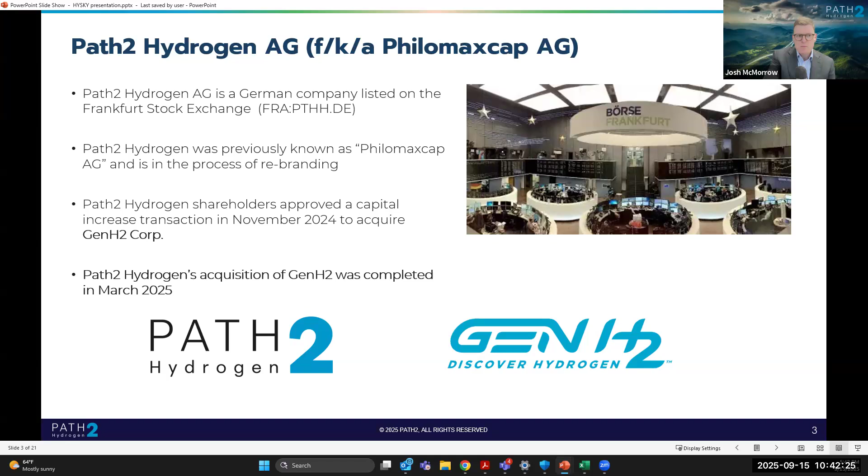So as I mentioned, Path2 Hydrogen is the parent company of GenH2. It is headquartered here in Germany, and GenH2 is a 100% subsidiary of Path2 Hydrogen. As I mentioned, we used to be called Philomaxcap. We are literally in the process right now of changing our name. So you may see both of those for a little while, but Path2 Hydrogen is the future name of the parent company. We completed the acquisition of GenH2 earlier this year, and I'm very excited to continue with the company's commercial deployment in North America. And we're now moving with purpose into Europe and into Asia Pac.

I always find it useful, this group is very tuned into hydrogen, but I always like to tell analysts or investors or people that are new to the space what GenH2 is and what it isn't. I refer to GenH2 as a specialist in midstream hydrogen technology and equipment. So we are not upstream. We don't produce the molecule. Everybody talks about the different color wheel of types of hydrogen.

For our sake, we focus on once that hydrogen is produced, we then liquefy it through many different sizes and types of liquefiers. But most importantly, and what GenH2 is really known for, is our ability to transfer and store that liquid hydrogen without any losses. And I'll go into more detail about that.

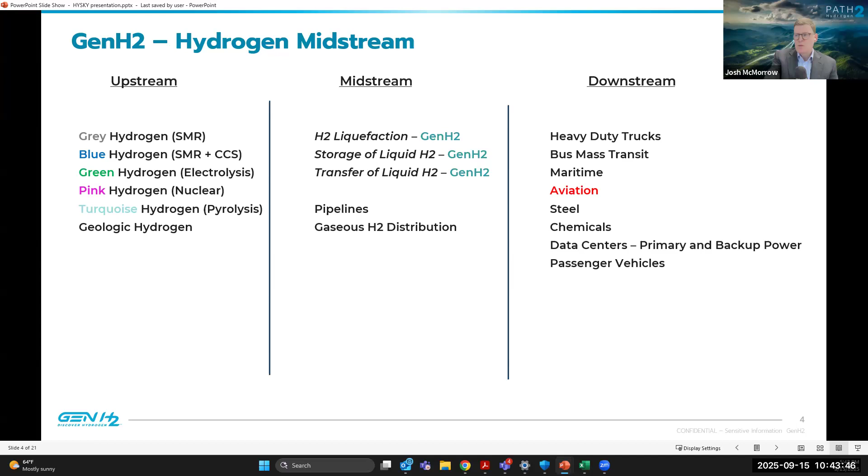Once you can achieve zero loss transfer and storage of liquid hydrogen, it really addresses one of the major pain points of liquid hydrogen, because there are so many benefits that I'll talk about shortly. But one of the key drawbacks up to this point has been the boil off and venting losses that I'll go into more detail during this presentation.

So a quick overview of GenH2. It is a company that's been around for about 4 or 5 years. It is headquartered in Titusville, Florida, which, as many of you know, is the home of NASA's Kennedy Space Center.

And there's a reason that it's headquartered in Titusville, Florida. It has deep ties to NASA. In fact, one of my favorite statistics about GenH2 is that in the history of NASA, there are only 45 — it used to be 42, but a few just got inducted — there are 45 NASA Inventor Hall of Famers. GenH2 has 2 of those Hall of Famers on staff, and one of them is one of only 5 women to have received that designation as a NASA Inventor Hall of Famer.

So we are quite proud, and it shows the depth and our ability to really punch far above our weight when it comes to our ability to understand liquid hydrogen, work with liquid hydrogen, and know what it takes to transfer and store it without any losses. Our footprint basically is most of the folks are located in the US and in particular in Titusville, but we have offices in Berlin, Germany, where I am, as well as a small office in Seoul, Korea.

So I mentioned this earlier. I always like to think about it in terms of what problems is GenH2 solving. So 2 of the problems as we think about it are, 1, the liquid hydrogen supply chain is losing 30 to 50% of the hydrogen delivered. Now, that's not just us saying that. Many of you have probably seen the recent article that came out by David Lease in H2 View.

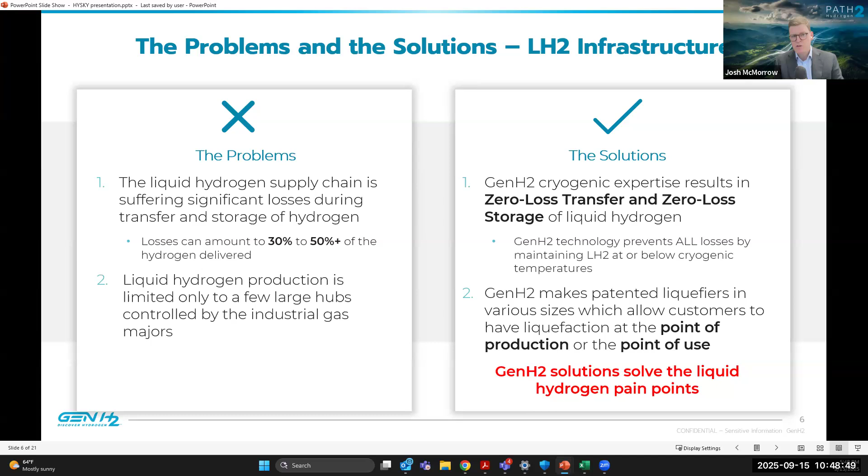But when you take a big step back, the real difference in the value that GenH2 is bringing to the marketplace is you can place these hydrogen liquefiers directly at the point of production. So think of an electrolysis facility or a hydrogen pyrolysis facility. Any way that the hydrogen is produced as a gas, you can put a GenH2 liquefier right there to liquefy 100 kilograms a day, 1 ton per day, 2 tons per day, 5 tons per day. It's very flexible and modular, and really brings a lot of advantages because you can do this liquefaction at the point of production or at the point of use.

So I probably don't have to go into too much with this audience on why liquid hydrogen versus gaseous, but there's a couple of these that I would like to have the group think about today. Obviously, liquid hydrogen has much higher density than gaseous hydrogen. It's much more efficient in transportation. Its ability to scale: earlier presentations have talked about the fact that gaseous hydrogen is very good for demonstration or small use cases. But once you really want to scale up to dispensing 1 ton per day or 2 tons per day or even more, liquid hydrogen makes a ton of sense. Otherwise, you're going to be running tube trailers out to this location essentially 24 hours per day.

The duty cycle isn't great, and there are many, many maintenance issues and more components when you're talking about gaseous hydrogen. With liquid hydrogen, it gives you a lot of flexibility to have fewer components, to have much more reliability to your operations, but you then have the flexibility once it's in liquid form to dispense as gas, to dispense as cryocompressed, or to dispense as liquid. But you don't have that flexibility if you start with gas.

For this group today, when we're thinking about aviation in particular, this next point is of utmost importance, and that's the safety. Gaseous hydrogen, again, I'm preaching to the choir here, I realize, but gaseous hydrogen is kept at 350 bar, 700 bar, sometimes 900 bar, whereas liquid hydrogen is kept at very, very low pressures, which means if you want to set up infrastructure for airports or marine ports or places where you really have to think about blast radiuses and what can be placed near something, and can it be placed in an operation where hundreds of thousands of people are transferring at an airport near there, liquid hydrogen is the answer because of its low pressure.

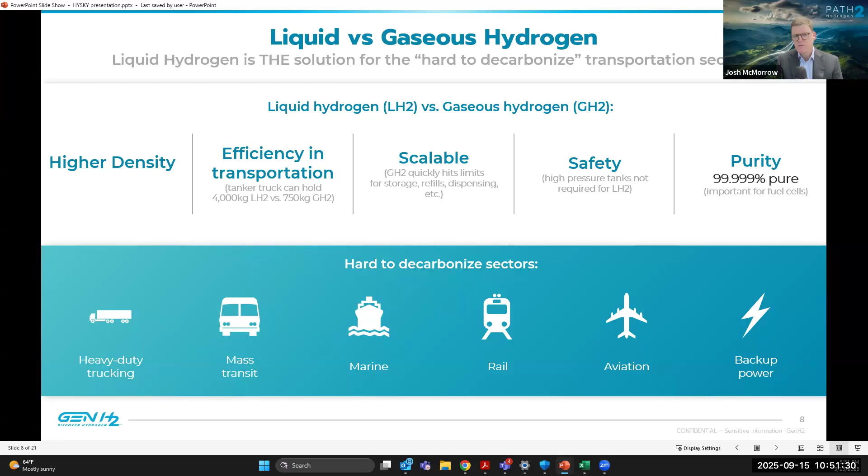I also mentioned purity. So anytime you go to liquid scale, you're essentially getting rid of all the contaminants in the hydrogen and you're getting five nines purity. Gaseous can become that, but is not always guaranteed. And if you want to be running hydrogen across a fuel cell, you're going to want five nines purity guaranteed. So you really need to be focusing on liquid at that point.

This is the slide I sort of change when I'm talking to my European friends. We have a football field, or soccer as we call it in North America. And I have an NFL football field when I'm talking to my American counterparts and countrymen. But this is a good demonstration of the footprint associated with the same amount of gaseous hydrogen and liquid hydrogen storage.

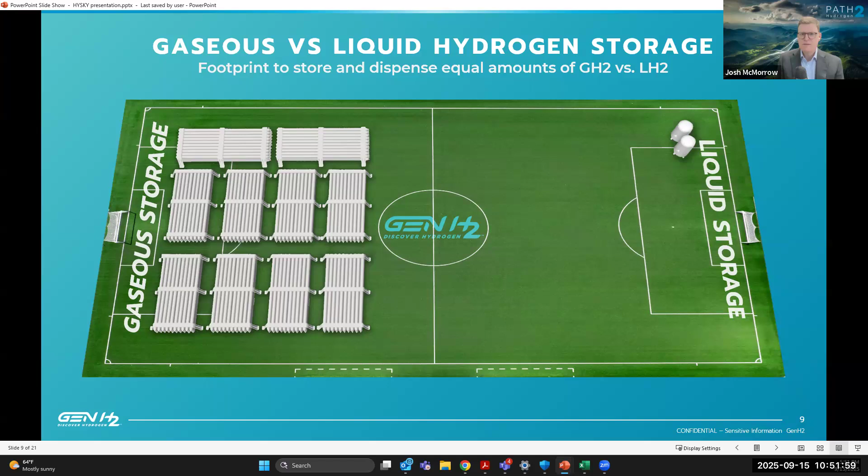So liquid hydrogen for aviation. There have been some very, very interesting studies out there. A lot of the discussion has been around Airbus and how quickly or slowly they're going. But there are a lot of benefits when you think about hydrogen for aviation. I think Danielle has covered these in a number of presentations, and others in the industry have talked about the range that comes with using hydrogen. But I also thought it was interesting that some of the recent articles have not just talked about hydrogen versus batteries. Obviously, there are advantages for range for hydrogen in that case.

But even when you think about hydrogen as opposed to SAF or e-methanol, hydrogen really has a lot of advantages other than very long haul flights. Hydrogen head to head beats both of those when you think about what you want to employ on the plane. Liquid hydrogen itself has all of the energy density, the ability to scale up. You don't have to modify the airport infrastructure all that much, given the fuels that are being used today. eSAF is very much thought of as sort of this plug and play replacement. But folks have been trying to make eSAF for a long time and make it viable and make it clean enough. And hydrogen, especially liquid hydrogen, answers both of those questions, again, without having to make major modifications to the airport infrastructure.

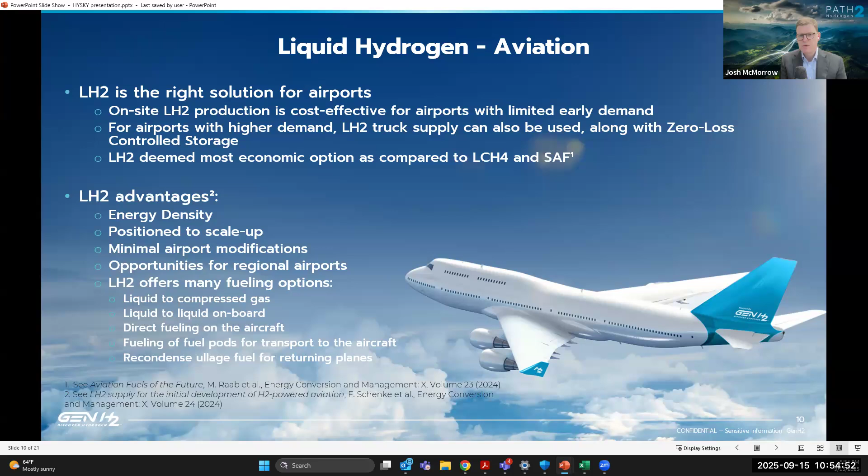It's our position that there are a lot of opportunities for regional airports as hydrogen becomes the preferred use case, for all the reasons that I talked about. You can go liquid to compressed gas. You can go liquid to liquid directly on board with onboard tanks, which we think is very, very interesting. Direct fueling on the aircraft is available. Folks have talked about refueling of fuel pods. You can think about solid state storage from liquid hydrogen into metal hydrides or something else if that's the type of tank you want on board. But essentially, once it's in liquid form, you have all the options in front of you. As opposed to gaseous form, where you're very limited in your ability to apply it at large scale to infrastructure and to fuel in different modalities. So liquid really, in our minds, is the right midstream medium when you're thinking about aviation.

Okay, so high level, when you think about airports and infrastructure, you have to think about how you get the hydrogen to the airport in the first place. Are you taking it in by pipeline? Are you creating it on site by having electricity go to electrolysis facilities? Are you trucking it in with liquid hydrogen?

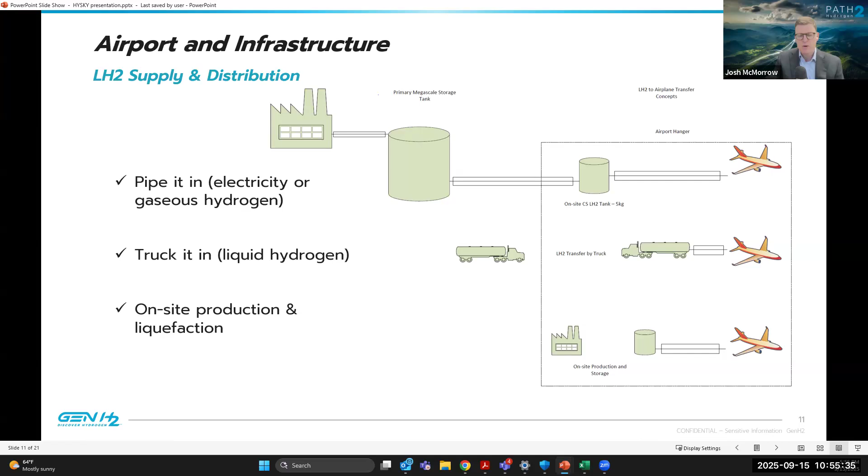Or are you producing and liquefying it on site? So there are different ways to think about doing that. But getting the liquid to the airport for the infrastructure so that it can be put on the airplanes, but also so it can fuel all of the different vehicles around the airport itself, is very, very key.

Okay, so let's get into sort of the flagship product of GenH2, and that is the controlled storage. And I'm going to tell you what I mean by controlled storage because from GenH2's perspective, there are a lot of companies out there that talk about their ability to prevent boil off. But most times, they're talking about boil off gas compressors or capturing boil off gas from tanks and potentially reliquefying that. I'm going to tell you why GenH2's solution, which is active refrigeration and preservation of the liquid hydrogen, is different from, and in our opinion, head and shoulders better than some of the other solutions that have been brought to the table thus far.

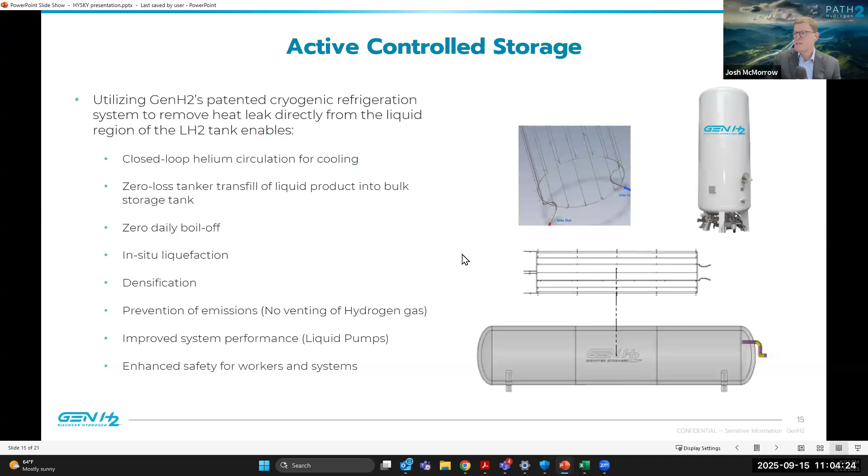Good. So this is a little bit what the RS-1500, that's what we call it, the RS-1500 controlled storage unit looks like. Now, this is a 2-skid design. We can also do a 1-skid design if there is cooling water available. But I just want to mention it's a very, very small, easy to work with footprint. And in this instance, you have a vertical tank. It doesn't matter to us if it's vertical or horizontal. But this one's vertical, and the heat lift assembly is inside this tank and is connected to the cryogenic refrigeration unit.

Good. Now, quickly, I want to talk about GenH2's liquefaction. I also think this is an interesting differentiator and something that is very applicable to hydrogen for aviation. Again, if I were to take a big step back, I saw that a number of folks are also from Europe here. Some folks from Germany and from Spain were on the call. Liquid hydrogen availability is a big issue.

The US, if you think about it right now, has roughly 350 tons per day available and being produced in the US. That's by big producers like Air Liquide, Air Products, Linde, Plug Power, and a few others. Europe, on the other hand, has roughly 30 tons per day only available. So, there's a supplier in central Germany, there's one in northern France, and there's one in the Netherlands, in Rotterdam. There is discussion about having more hydrogen liquefaction available in Europe, but right now it's 10% of what's available in the US, and more of that needs to be available.

And for customers in Europe in particular who want liquid hydrogen and need liquid hydrogen, especially for aviation, they're not in a position right now to build their own 30-ton per day liquefier. And if they only need 100 kilograms a day to test their eVTOLs or their planes, or maybe they want to graduate up to 500 kilograms a day or 1 ton per day, it's difficult to get that delivered from the limited amount that's available in Europe.

So GenH2 has approached this a little bit differently. As I mentioned, we have different sizes of sort of flexible modular hydrogen liquefiers. I think of it as 20 kilograms a day, up to 100 kilograms a day, and then you get into the 1 ton, 2 ton, 5 tons per day. Between 100 kilograms a day and up to 5 tons per day, the beauty of GenH2's approach is there is no liquid nitrogen pre-cooling needed.

Now, we can use liquid nitrogen for pre-cooling if it's available, but if it's not available, GenH2's Brayton cycle liquefiers do not need liquid nitrogen pre-cooling. So some of you may be asking, why does that matter? Well, the reason it matters is because for every kilogram of liquid hydrogen produced, you need 8 to 10 kilograms of liquid nitrogen for pre-cooling when you're using these Claude cycle liquefiers, which is typically the cycle that's used for 15 tons a day and 30 tons per day.

So if you have a 30 ton per day liquefier, which is what Air Liquide has in Las Vegas, and what Air Products is talking about building in Rotterdam, you need to have 8 to 10 times that amount of liquid nitrogen available to make that liquid hydrogen. You need that liquid nitrogen for pre-cooling. GenH2's technology does not require that. So it really gives GenH2 the equipment, the ability to be sort of plug and play.

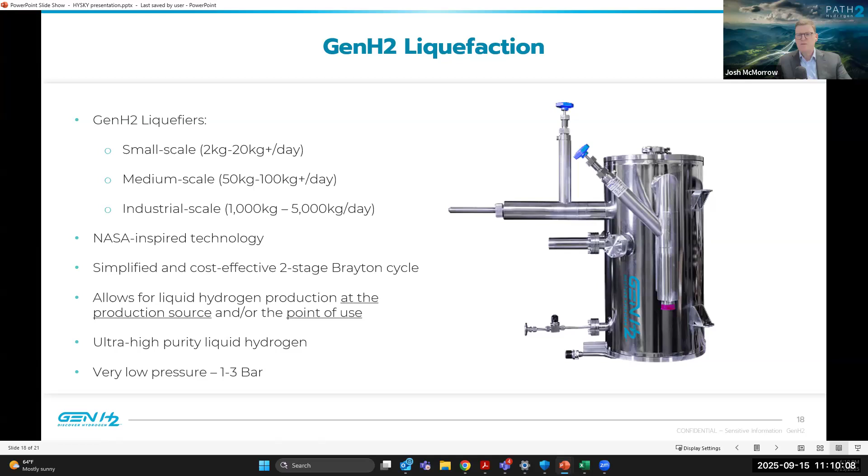as opposed to waiting for the industrial gas companies to go through their process and build some very large sort of regional hub liquefier. GenH2 gives people the ability to put it either at the point of production or at the point of use. It's very low pressure. It's very high purity. It's very safe. It's a great solution for aviation.

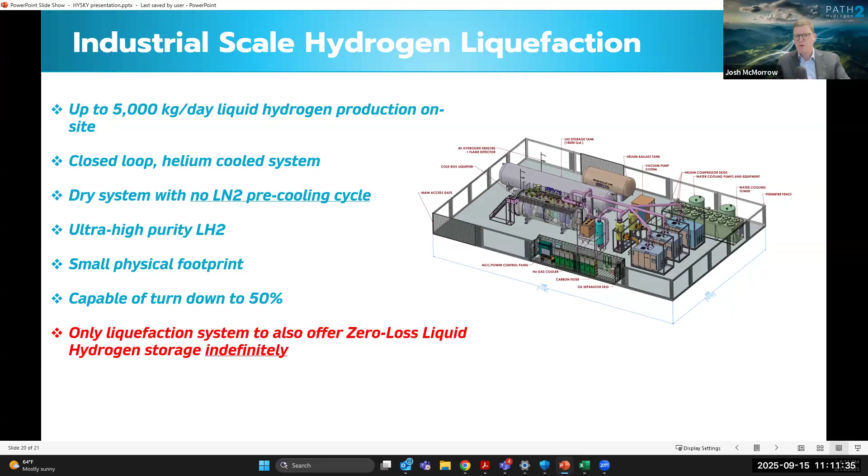One of the great things about the GenH2 liquefiers as well is that when GenH2 makes a liquefier, you're obviously going to need somewhere to store that liquid hydrogen once it's made. And GenH2's zero loss controlled storage essentially comes with a GenH2 liquefier when you're thinking about 1 ton per day and up. So you really almost get controlled storage for free when you're ordering a GenH2 liquid hydrogen liquefier.

I hope that this has been of use for folks on this call. I know there's a lot of liquid hydrogen or hydrogen aviation enthusiasts and folks in the industry, and we're really excited at the Path2 Hydrogen level and at the GenH2 level to be talking with all of you today. So at this point, Danielle, I'll open it up for questions.

Awesome. Thanks so much, Josh. That went by so fast. I appreciate the quality of the content. Very exciting. And that slide that you mentioned was kind of busy was my favorite slide. I spent like 30 minutes looking at it last night. So really good job. We have lots of questions.

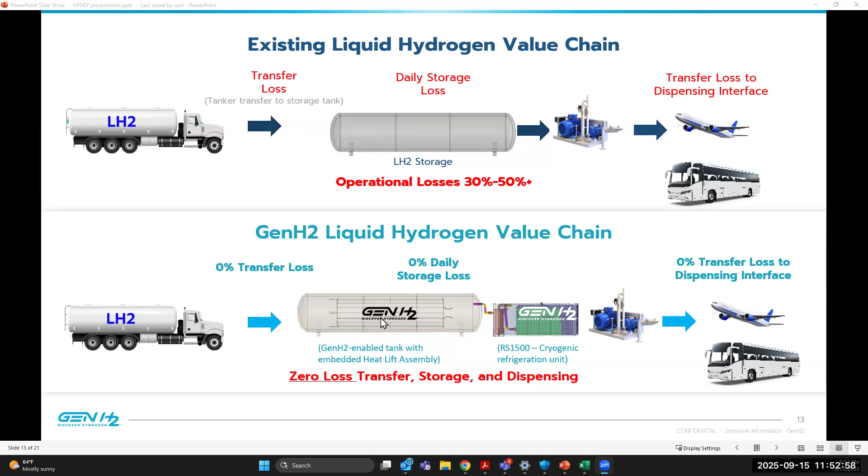Okay, interesting. And I had another question later, I'm just going to go ahead and ask it now. How mobile is this combination of systems, the liquefier and the cooling system, for people that might want to move these systems around from test site to test site? Yeah. Well, GenH2 has already built this LS20, which is on wheels. So we can make mobile liquefiers, that's for sure. The controlled storage system is meant to be semi-permanent. That being said, it's skid based. So if you did want to move it from one place to another, that could be done. We intentionally designed this to be built on a skid and put on a truck if necessary.

That picture that you have right there of that mobile unit, can you give us any kind of ballpark idea about what the cost of a system like that is? I don't have that at my fingertips. It's going to depend on the exact configuration, and we don't really put that out publicly. Yeah, it's a fair question. I understand why you'd ask it. Sure, I can understand. We can talk offline. Interesting though, thank you. Yeah, happy to talk offline. Thanks.

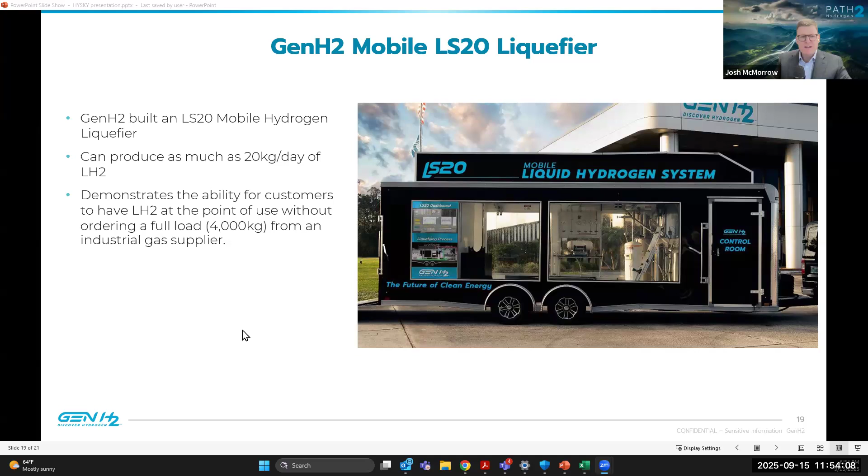Great questions. I have to say, Josh, GenH2, HYSKY's been following you all for years. And since I first learned about you in like 2022 or 23, you guys have just been right in the pocket. You're exactly where you need to be. You definitely understand knowing your capabilities and then just becoming very good at it. So I'm super excited because this is exactly what aviation's been missing. Thanks, Danielle.

Okay, I think the next question is George. Again, might have been something that we covered already, but I just want to make sure I get to everybody. George, if you're on, feel free to ask your question. Is this Jörg Wimbert, I assume? You mean Jörg by George? Yes. Thank you. Hi, Jörg. Yeah, very interesting presentation.

My question was pretty much already answered. I was wondering about liquefaction efficiency because it doesn't scale linearly, but you already did a good job answering that. I would definitely like to understand a little bit better your 1 ton and 5 ton liquefaction efficiencies and how it scales. It was a good point you brought in terms of helium as well and making sure you look at all the costs, but it would be interesting to see the OpEx comparison, but I'll reach out separately. Yeah, really please do, Jörg. I'll put you in touch with our sales and commercial development folks who can walk you through that.